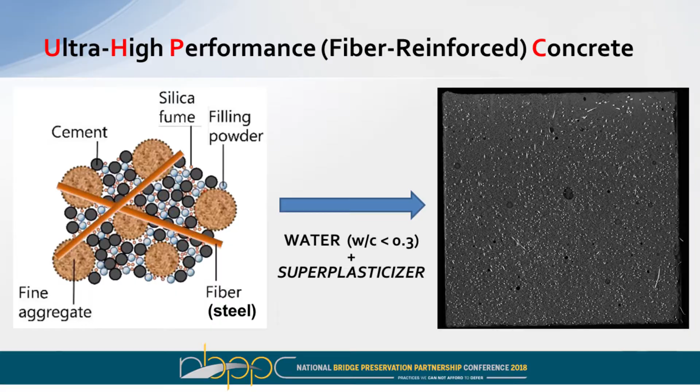I'm going to build on what Zach started talking about with UHPC. Basically it's a concrete material: cement, sand, silica fume, no coarse aggregate. It's all very fine particulate. You add a low water to cement ratio, generally less than 0.3, a heavy amount of superplasticizer to keep it flowable, and once it hardens and you cut it, a heavy dose of fibers. You can see the shiny flecks - these are tiny microfibers, evenly distributed throughout the cross section, playing a pivotal role in crack control and tension strength.

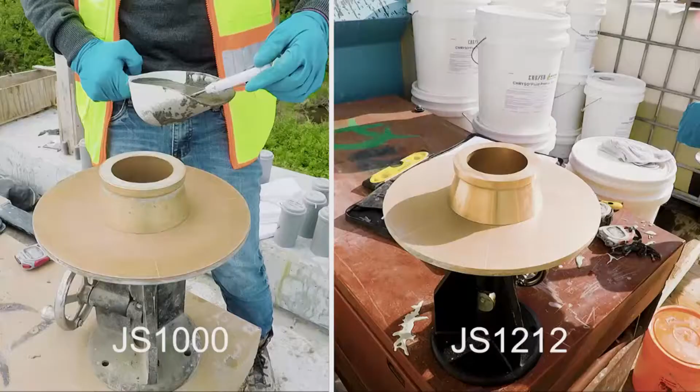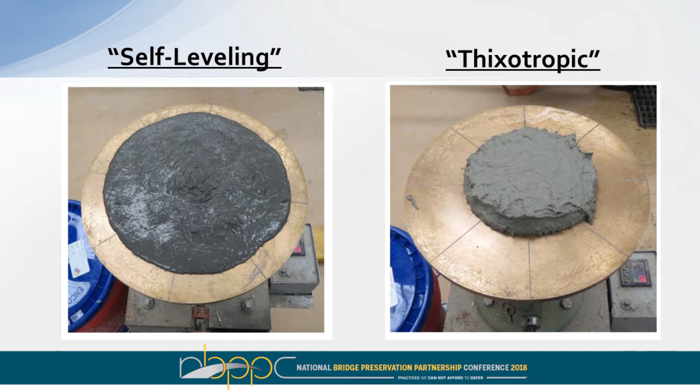We already saw the material flow, but here's another visual. We have two versions. One is self-leveling - it flows where gravity wants it to flow. There's a bit of stickiness to this product, due to how fine the particles are, lots of cling to each other. But it does flow where gravity tells it to go, and it will leak through any tiny void or hole or crack that exists, so forming becomes key in various applications.

On the other side, we have a thixotropic version. This is what we use for overlays because bridges have slopes, and if we used a self-leveling product, it would go where gravity tells it to go. So we use a different admixture that gives it a thickening behavior. As you impart energy into it, the material looks fluid, and as soon as you take away that energy, it stiffens up and maintains its form.

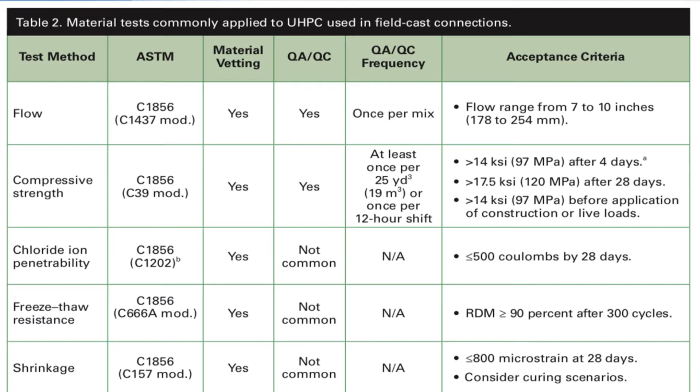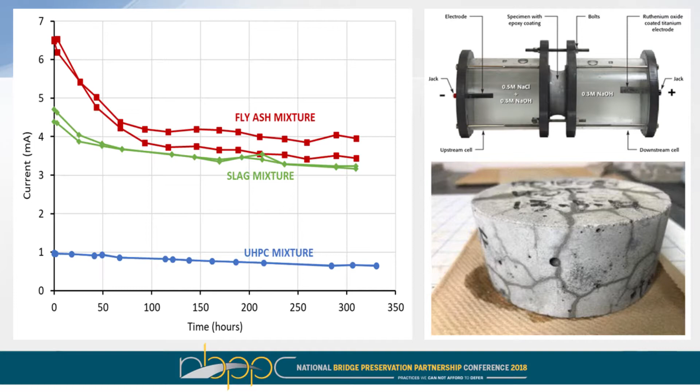We also look at cracked properties. The photo on the bottom right is a section that's been cracked intentionally, showing the fine micro cracking nature of this material, held together by these fibers. Impermeability is just one parameter - we have good abrasion resistance, good freeze-thaw resistance. Compared to high performance or conventional concretes, we're much lower than these other mix designs. This gives you a side-by-side comparison.

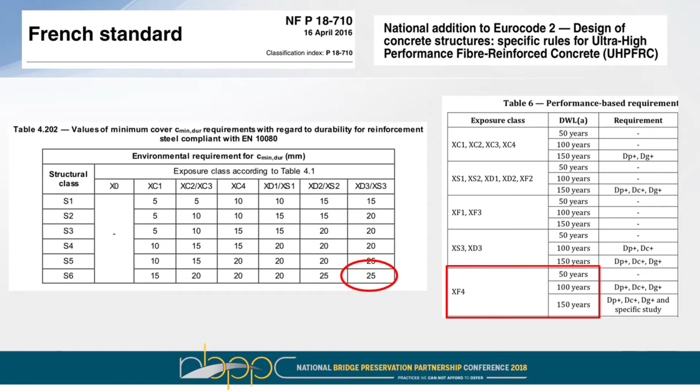So testing has shown that if I put 1 inch of cover over black rebar with this technology, using a standard UHPC, I can guarantee 50 years of service life before seeing any corrosion of that steel. If I use enhanced UHPC, with even better durability, we can get up to 100 and 150 years without increasing cover. Of course you could increase cover to get longevity as well, but you can also do it by tweaking the mix design itself.

The tension behavior is really unique to this material. These fibers create a multi-cracking behavior, and all these cracks are kept to a very fine micro size.

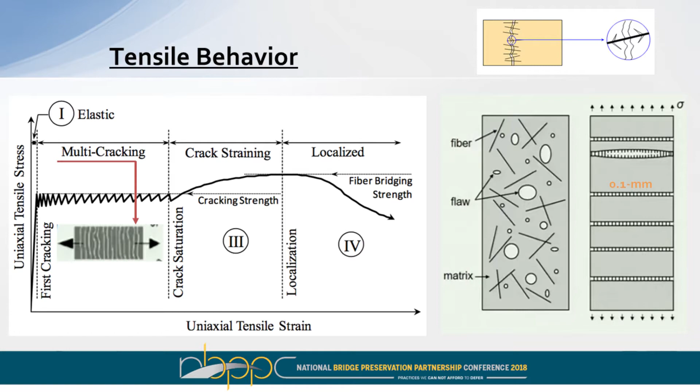So they virtually remain impregnable to chlorides, water, acids, and other aggressors that deteriorate our structures. But they also add a neat feature - they give concrete flexibility. So you can cast a very thin panel of this material and literally bend it like a plywood piece. Obviously you're not going to do this to your bridge deck, but it shows that in order for this element to bend, hundreds of cracks have to form to give it that displacement. And you can't really see one singular crack anywhere on this element - they're all very fine and evenly distributed across the stressed area.

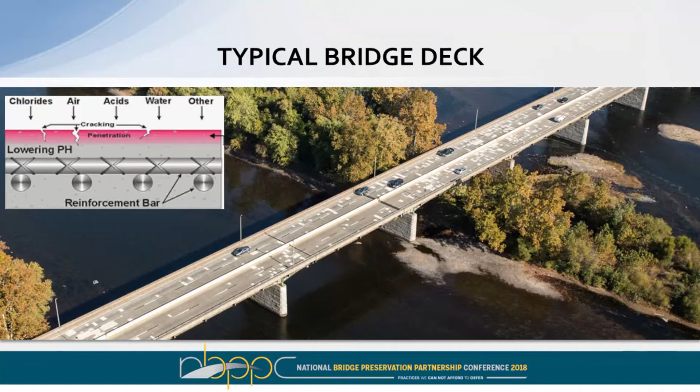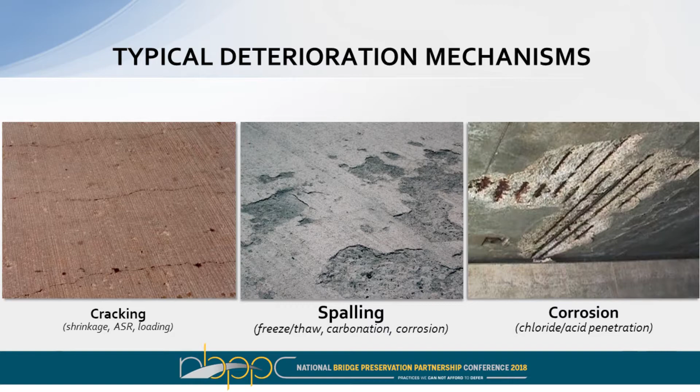So where this comes into play is when we look at bridge decks. Everyone here understands that they deteriorate quite quickly and need repair, rehabilitation, and preservation. UHPC overlay is one way to do it. If you let your bridge deck go too far, you end up having to replace the deck itself.

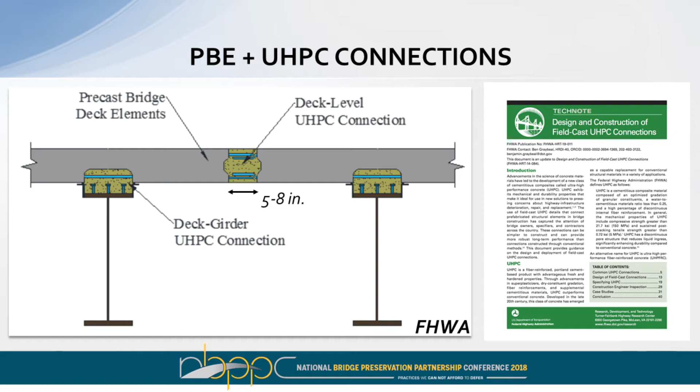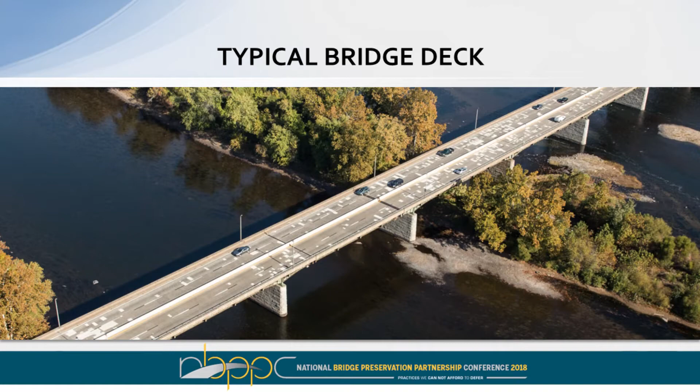Up in the Northeast, we've done a ton of these projects. You can see all the dots ranging back from 2005 up until the end of 2018, and of course there's more dots that'll be put in here this year. But the idea here is really to get onto the bridge deck before it's gotten to the point where it needs to be fully replaced. So can we do a partial depth removal and rebuild that back with UHPC rather than having to replace the deck in its entirety?

So there are three concepts that have emerged over the years. Ideally, number one is we get on the deck early enough when the contamination hasn't gotten too far gone, and we only have to remove a marginal amount of cover, maybe an inch or inch and a half, and then build that back with this very durable, impermeable material. But if your concrete has gone too far, your rebar has already started to corrode, and you have delamination down at the rebar level, you'll likely have to remove past that point. Generally we'd like to get about three-quarters of an inch underneath the top mat so that the material with these fibers can really get around all this rebar and surround it and encapsulate it.

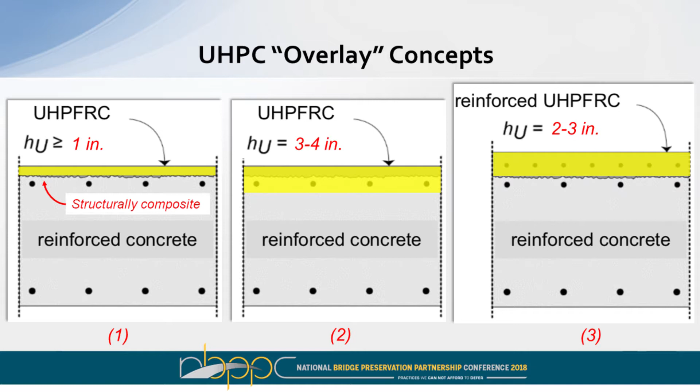In the last instance, number three, you might be looking to strengthen your section as well - not just rebuilding back a layer, but adding some strength to it. In that case, you can build on top and put in supplemental reinforcing steel to give you additional tension capacity where you might need it.

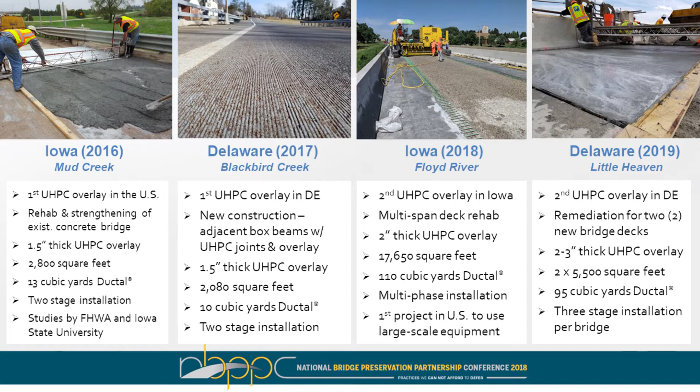And really a lot of these are using concept number 1. We're not really exposing that top layer of steel, we're just removing down the cover and then building back 1.5 to 2 inches or so.

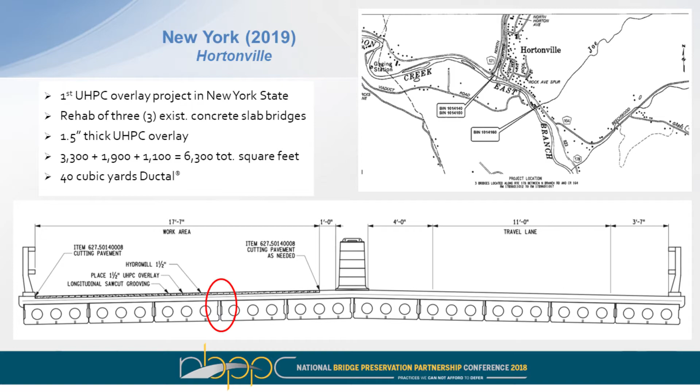Earlier this year, we did a 3-bridge package in New York State, down in the Hortonville area. Kind of a unique structure where they had these adjacent voided slabs, and they had seen some reflective cracking or the piano key effect, as we heard before. Their idea was, well, let's try to restitch everything together with a UHPC layer. So they went back and did about a 1.5 inch strengthening layer on top of that system.

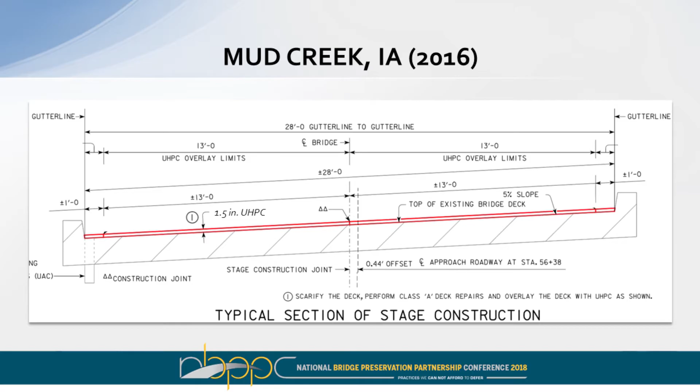So this was the bridge in Iowa back in 2016, 1.5 inch removal and replacement. Generally, surface prep - exactly like the last presenter talked about - you can do this on a milled surface or a hydro demoed surface. The hydro demoed surface tends to be preferable in the sense that it's going to bust away whatever poor concrete is there. With a milling effect, you might not get everything, and actually we saw this on the Iowa job.

They did a mill, which is shown on the left photo. They poured the overlay, and then after everything was done, they went back and did a chain drag, and found that there actually was some delamination. It wasn't between the UHPC and the substrate - it was underneath the rebar where the poor concrete had not been fully removed.

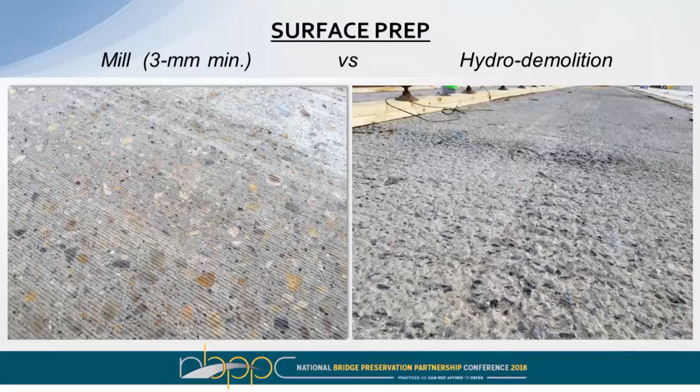So if you go the hydro-demo route, you're really going to get that material down to sound substrate material. As far as mixing equipment goes, it really depends on the size of your project.

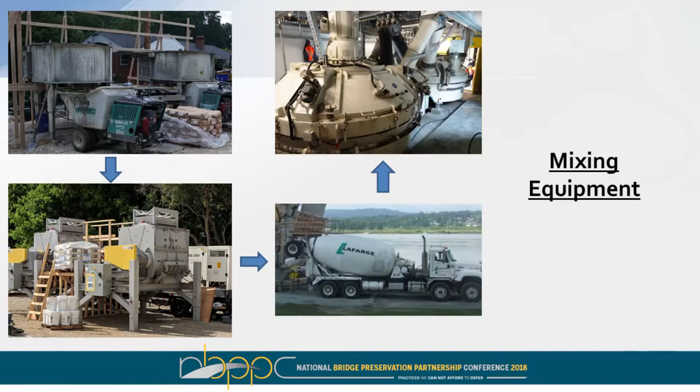Right now we've been doing fairly smaller bridge projects, so the mixers on the left-hand side are what we've been using. They're basically transportable pan mixers or horizontal shaft mixers that get set up on the job site, loaded with materials there, batched on site, and then transported to the bridge. But as your project size grows, you might need a ready-mix truck or even an on-site batching plant.

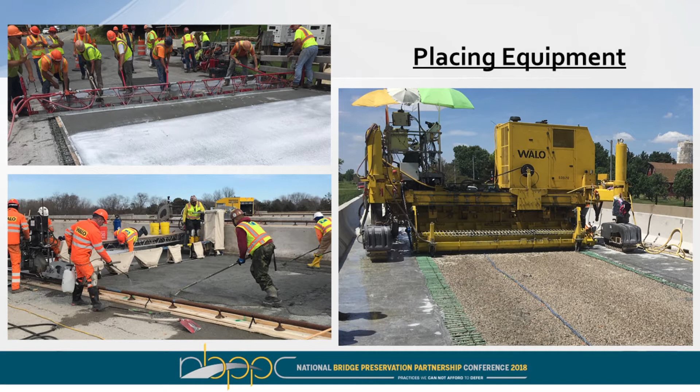For placing equipment, we use fairly regular equipment. The top left is just a vibratory steel screed used on a couple of these projects. The bottom left is basically the same thing, a vibratory screed, but a little more refined — the contractor on this job had it on a rail-mounted system to give more ease of movement. On the right is a large placement machine specially designed for placing UHPC, originated in Europe, more used for larger placements where it would justify something of that size.

So this is the first job. You can see the finish on this was not great. The contractor rushed through this job, unfortunately, and used a screed with very low vibration input. So the screed wasn't really consolidating the material as it passed over — it was kind of dragging the material, and we ended up with a very rough finish.

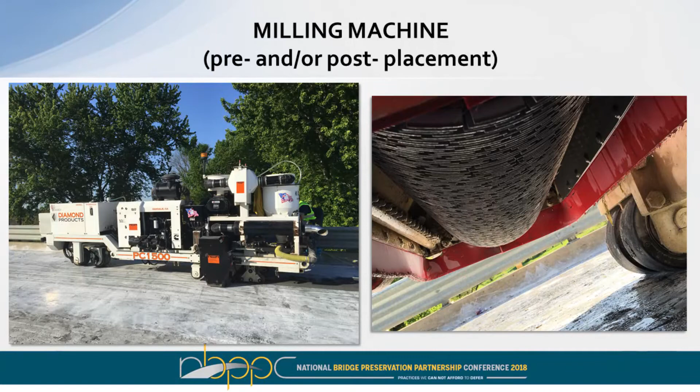What we've seen on subsequent jobs is if you have a screed with enough vibration, you get a pretty clean, stricken surface. But nevertheless, on a lot of these jobs they come through and do a post-milling process anyway, using a milling machine, either before to prep the deck or after to finish off the deck.

This is a couple of photos showing that milling process. Generally we take off about a quarter of an inch, and you can see on the right-hand side the finished milled surface look in the fresh state.

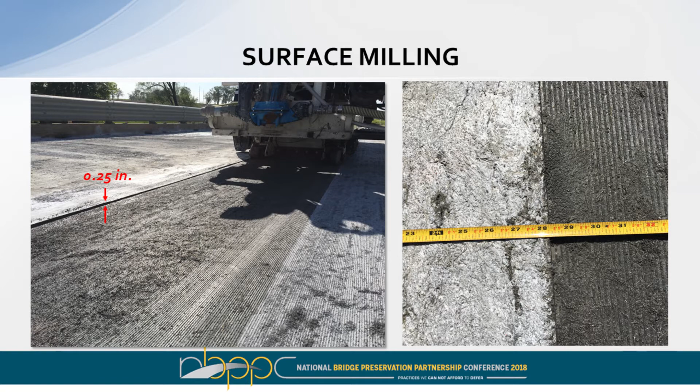And then some agencies will also groove the deck — I've seen it in some agencies, some don't. They use the same equipment you'd use on conventional concrete to do the grooving on this material. This is a shot of that Iowa project back in 2016. The left-hand side had been milled and the right-hand side had been grooved, and they're continuing to groove on the left-hand side with the machine there.

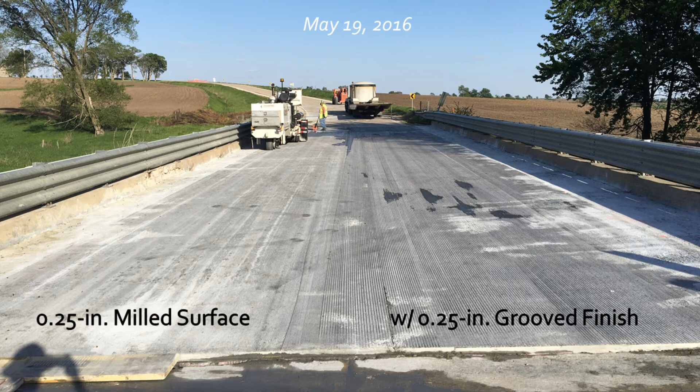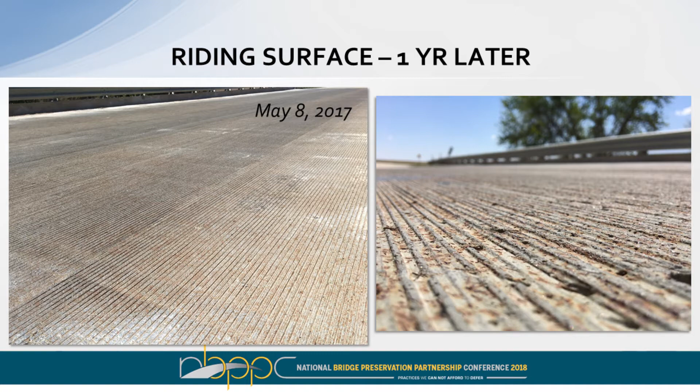This is what the riding surface looked like about a year later after the job was done. You'll see an orangish hue to the deck. During the milling process you expose a little bit of those steel fibers, and whatever has been exposed will corrode off the surface. On the right-hand side, you can see that any fibers that were sticking up have disappeared, just leaving behind a nice historic-looking corroded surface.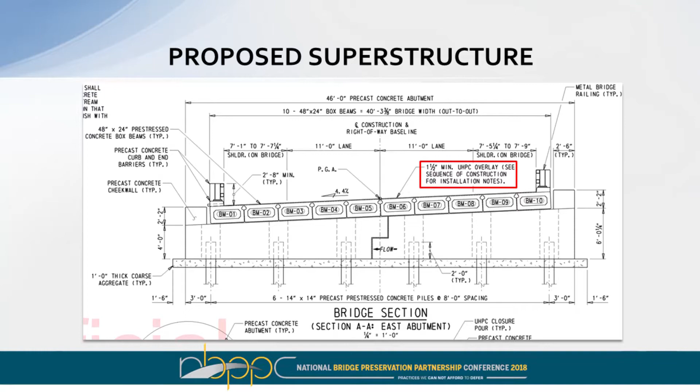Another job in Delaware, this was the second one, a little bit of a different situation. We had an adjacent box beam system, a new superstructure where they used UHPC both in the joints to connect the boxes together and as an overlay to give an impermeable seal to the box system. They also used it at the ends of the beams to cap everything.

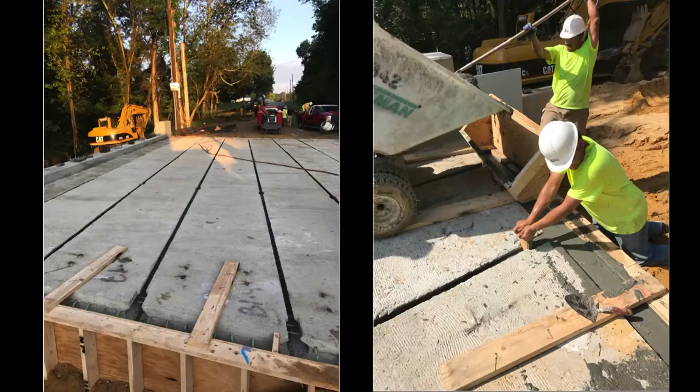Here are a couple of photos from this — you can see the box beams and them filling up the ends of the beams with our self-leveling version. We did a pre-construction mock-up with the contractor on this, which we highly recommend if the contractor has never done UHPC overlay work before, because it behaves a little differently than what they're likely used to. Here's a little video of that mock-up.

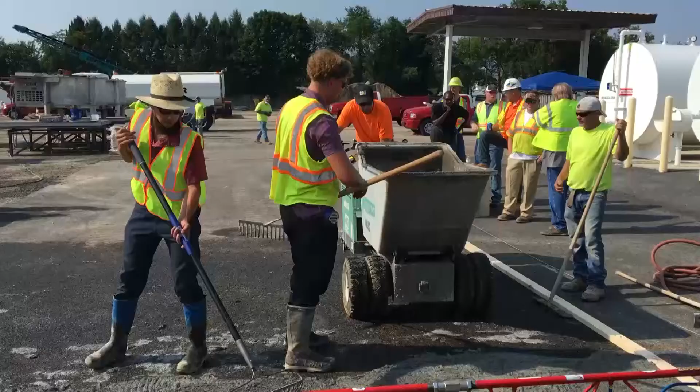You can see it flows out fairly fluidly, and the second it starts to spread, it really stabilizes on itself. We just have guys with rakes and shovels moving the material around in front of that screed. Pretty easy to do, quite frankly, but you need enough folks out there to do it properly. They had a roughened surface to pour against.

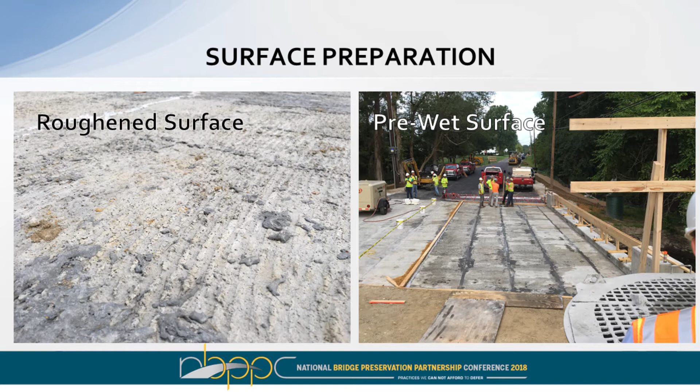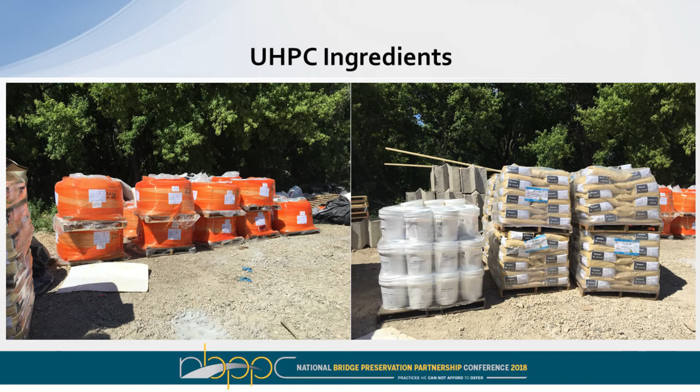They pre-wetted that surface before placing the material. On this job, since it was a small enough project, we provided materials in bagged form. On the left you see the pre-bagged premix, and on the right are bags of steel fibers and tubs of superplasticizing admixture.

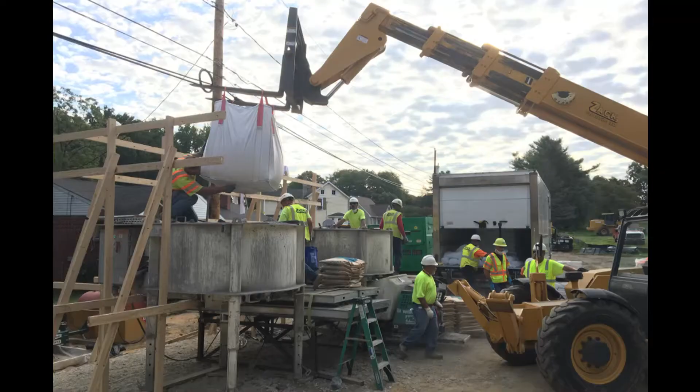We had these smaller pan mixers, each one mixing about two-thirds of a yard per batch, with two working in tandem. We can do about three batches per hour, giving us an output capacity of about four cubic yards per hour. There's a guy loading the bag into the mixer here, and another video of them placing it on the bridge deck itself.

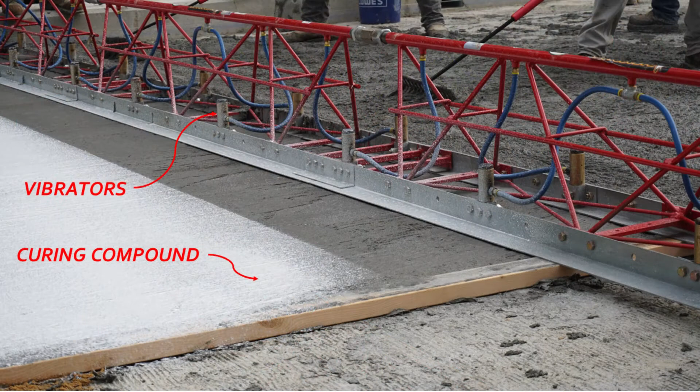So again, spread it out with some rakes in front of the screed, and then we hit it with a heavy dose of curing compound after the screed has passed over. The screed has high energy input to really consolidate the material as it passes over it, and then we cover it with plastic for curing.

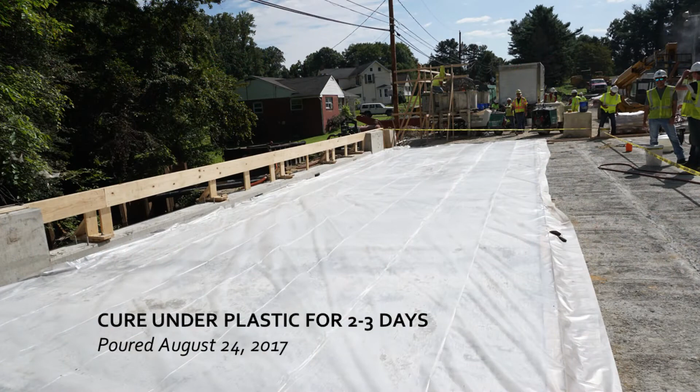We don't have to wet cure it. We just want to seal in the moisture that is already in the mix itself, and let it cure for about 2 to 3 days.

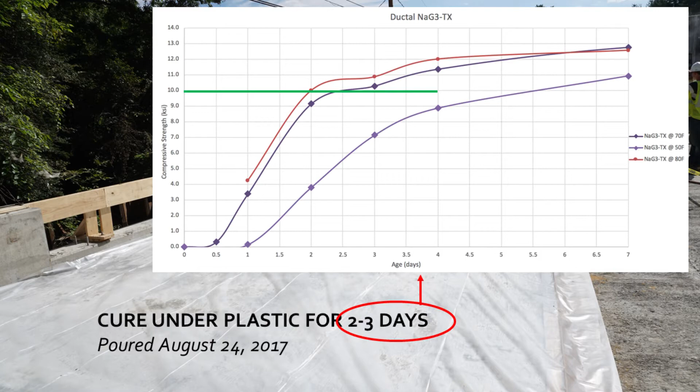So this is the strength curve of this material. We've generally been targeting about 10 KSI before opening to traffic. Depending on your temperature out there, you're going to get that in about 2 to 3 days with this particular mix design. We're working on improving that to hopefully get that in a day or so, and that's ongoing.

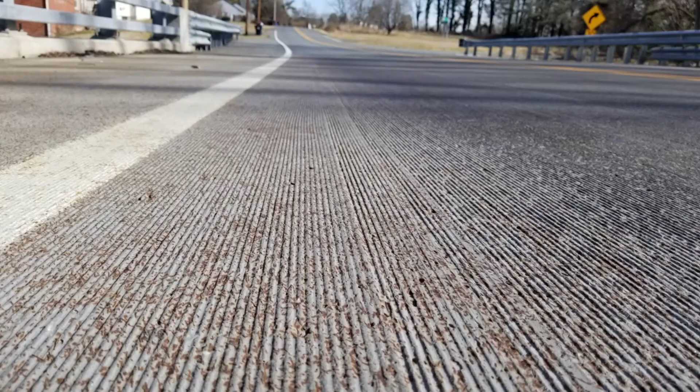So this was a well-attended job site by Delaware DOT. I think they had everyone from their bridge office out there to watch it, which is good, helps disseminate the information quickly through the team. And then after they milled it, this is kind of the final riding surface here.

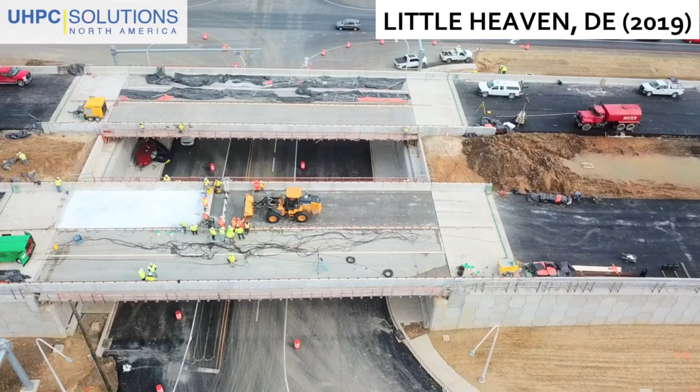So a couple other photos just to show off the other projects. This was another Iowa job in 2018, a little bit larger production done by Walo, and kind of the final surface there. And then another job earlier this year in February. So we had some heating elements as part of this due to the weather conditions out there, but this was the 2 parallel bridge that was done by UHPC Solutions here.

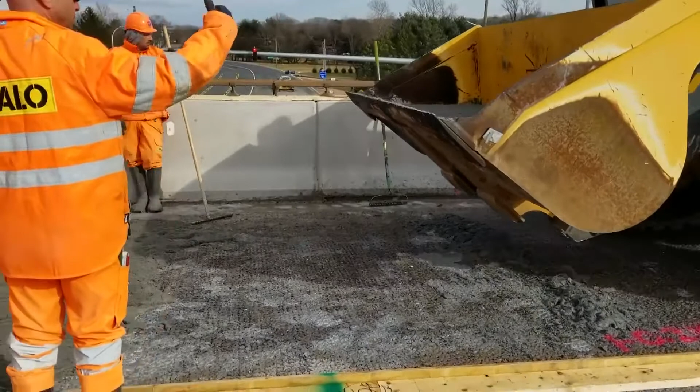And then one more video here showing the placement. So this was a little bit of a bigger job, so we had a front end loader that we kind of used instead of those motorized buggies. And we could come out and dump the material right on the bridge deck in front of the screed.

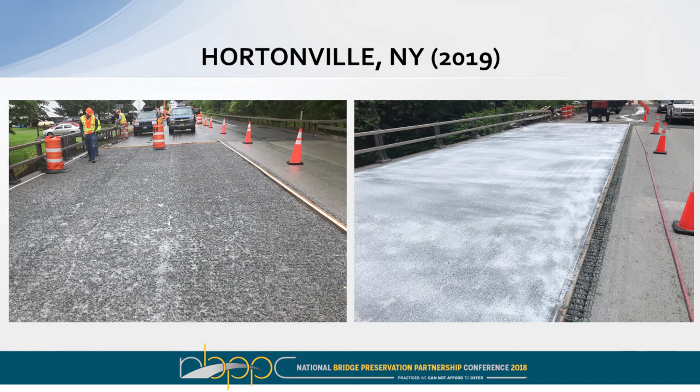A few shots from the New York job from earlier this year. They did a hydro on the deck and then placed the material, and the white is the curing compound they put on afterwards. I'd be remiss if I didn't mention Switzerland in here.

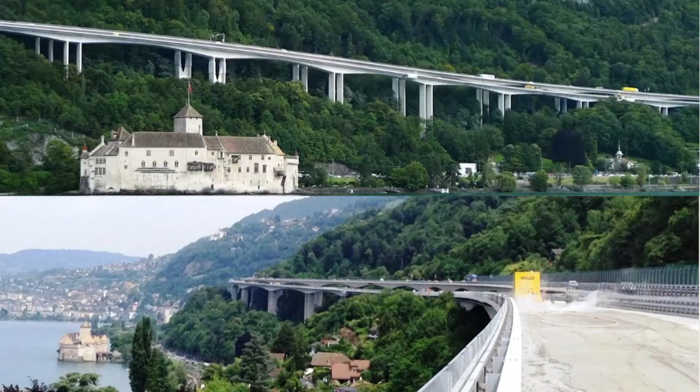The Swiss have really done a lot of this technology. They've done over 70 bridges now to date, and most notably has been the CHILLON viaduct. So this is kind of a signature bridge where they strengthened this entire system using a UHPC overlay about 1.6 to 2 inch thick.

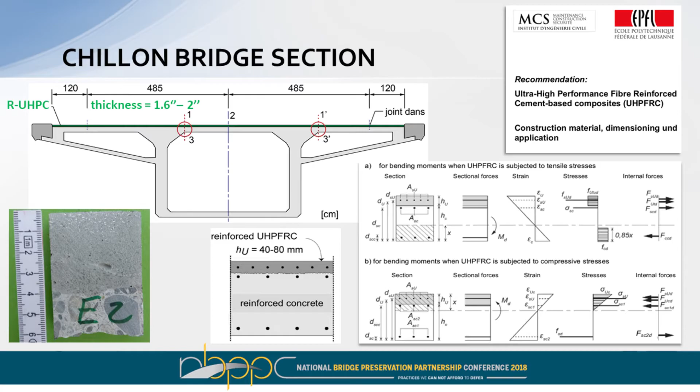And this is the cross section of that box section here. And there are guides published by the Swiss that will show you how to strengthen, how to design for this type of a situation. I'm not really going into that, but it can be used to that effect if needed.

And because of the larger scale of this job, they had an on-site batch plant. They used their specialized machine for this placement, which made things go quite quickly. I think they did this entire bridge in about 30 days, 2 twinning bridges.

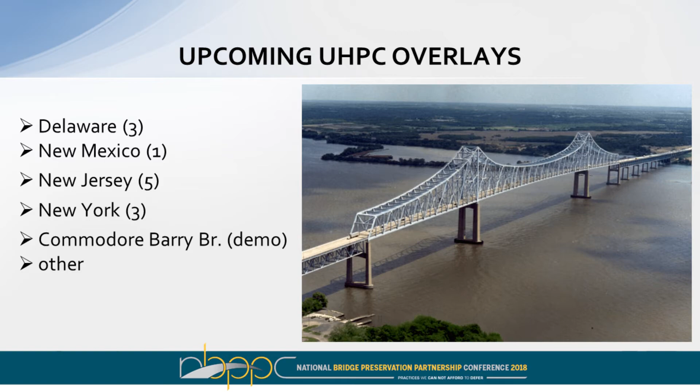Quite a few coming up still. Delaware has a 3-bridge package that's coming up. New Mexico, I know, is trying to do one. New Jersey has a 5-bridge package they're looking at. New York has 3 or so bridges in their pipeline. And then the Commodore Barry Bridge is looking at doing a demonstration pour next year, kind of isolated sections to try this out, and other projects as well that we are actively tracking.

If you want to learn more, the FHWA has published some guides on this. You can refer to those. Iowa State University has done quite a bit of testing on this, looking at the bond strength and everything, and it all looks pretty good.

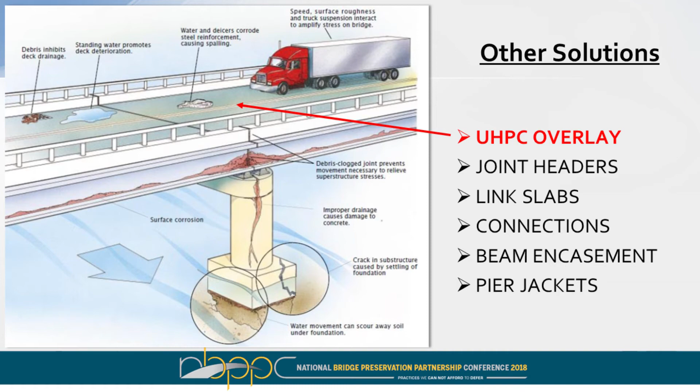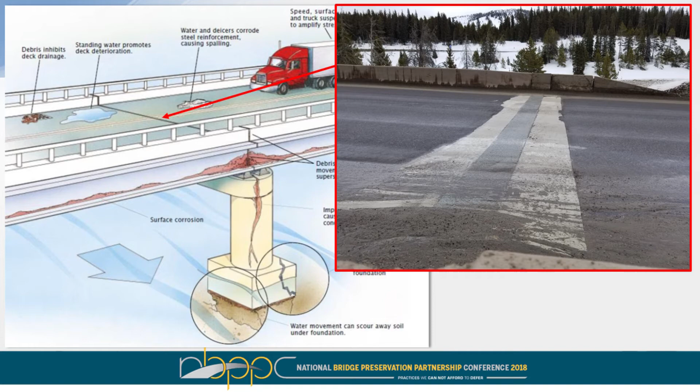So just to close here, talking UHPC overlay, and Zach had shown some other ideas. Joint headers, link slabs, connections, beam encasements. We did a joint header up in Colorado last year in an area which uses a lot of heavy truck traffic in the winter with chains, and it's held up very well so far.

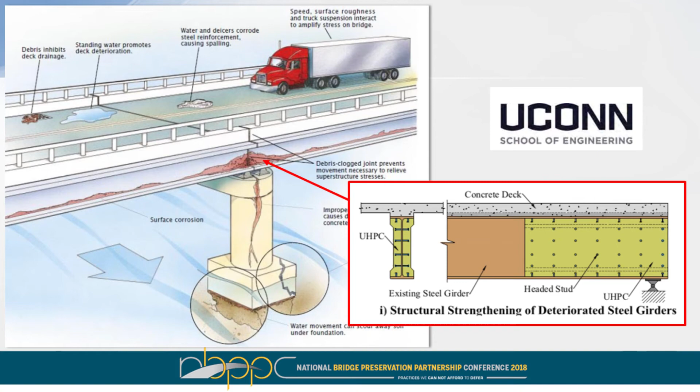We've done a ton of link slabs in the New York State area, and now Delaware is starting to do some, as well as West Virginia, Maryland. So if you want to eliminate the joint completely, you can put in this flexible linking element to remove that.

And then as Zach talked about, beam encasements, which is really kind of a brainchild of University of Connecticut that is coming to fruition now to encapsulate these steel girders. And jacketing as well. So if you have piers that need some TLC, you can remove the deteriorated concrete and put a thin jacket of UHPC around there.

So if you want to learn more, go to our website, www.ductal.com, or our Vimeo page, and you can see some more videos like we showed here. Any questions? Well done.